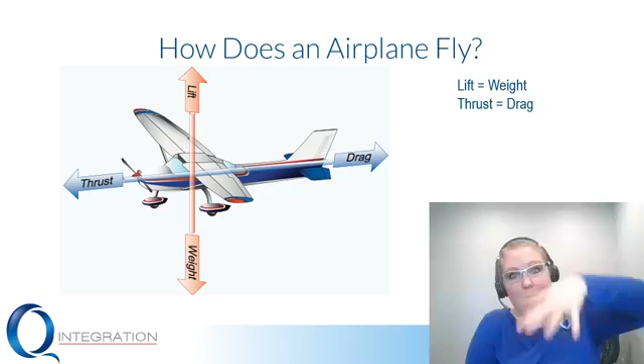So when you're driving down the road and you see one of those cars that has a big thing that sticks up on top of their trunk, it kind of looks like a wing. People call it a spoiler. That's the exact opposite of a wing, or it is a wing, but it's flipped upside down. The whole purpose of that is we want to create force to push it towards the ground so it'll hug the road tighter. Airplanes are the exact opposite. We want it to go up, not down, so we want the lift to be pushing up. We want to get off the ground, lift off the ground. So how do we do that?

Well, I'm going to introduce you to Daniel Bernoulli. Daniel Bernoulli is this guy back in, I believe, the 1700s, came from a super smart family, really smart family. He wrote a book, which a lot of smart people do. He has proven what's called the Venturi effect, and we're going to talk about that here in a second. But the Bernoulli principle is the basics of how anything generates lift.

And all it boils down to is having pressure on something. I want more pressure on the bottom of the wing than I do the top of the wing. If I have pressure, meaning I'm pushing up on it, it's going to be lifted up.

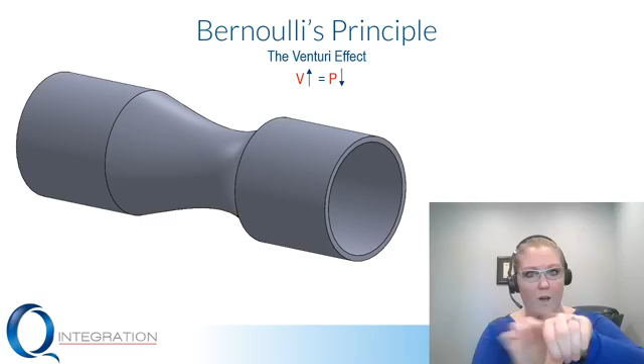Specifically, he talks about the Venturi effect, which I just mentioned a second ago. What is the Venturi effect? Well, picture a section of garden hose, some small section of garden hose. Now you put your hand around the middle of that section and you squeeze just a little bit, not so much that you shut off all of the flow in there. So we've got water going through here, just as you can see in our picture. This is our garden hose. Now we've squeezed the center here, but there's still water flowing from here to here. What happens to the water inside where it's being squeezed? Well, let's look at that.

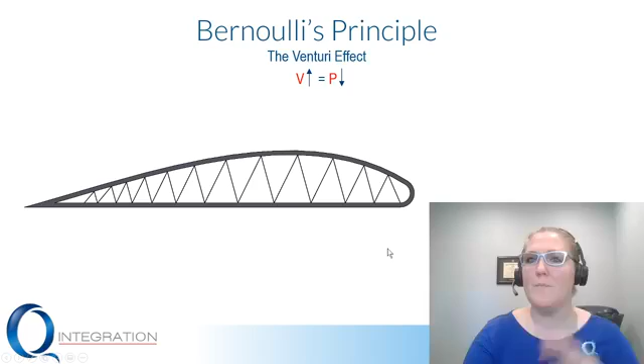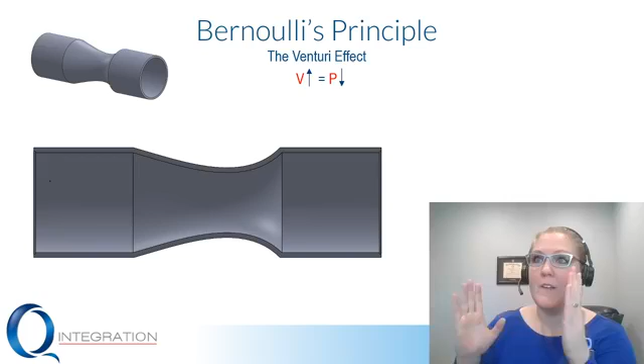I'll show you here in just a second. We've done a section view, and I've shown you an internal cross section of this Venturi tube, which is like I said, the piece of hose squeezed in the center. So what's happening when we put water from here to here?

Well, the Venturi effect basically boils down to: as velocity increases, our pressure decreases. Let me talk about that a little bit more. The wing would sit underneath here, so that's where your cross section is.

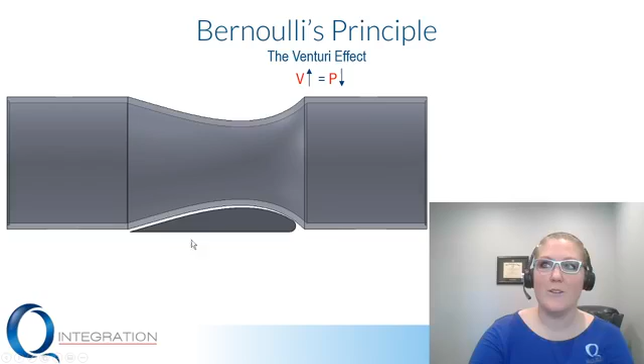We've got a ton of wind coming toward us, hitting the leading edge of this wing, trailing over the top of it and underneath it, and getting deflected off the back end. So notice how much more distance the air particles have to travel due to the fact that the top of this is curved, versus just having a straight path getting straight from here to here.

How do they do that? In order for these guys who have to travel way further to meet with these guys who don't have to travel very far at all — just a straight line, path of least resistance, which is a lot faster typically — these guys have to run a lot faster. So they're going faster than the guys down here, and the faster the velocity of the particles on top, the less pressure they're going to have.

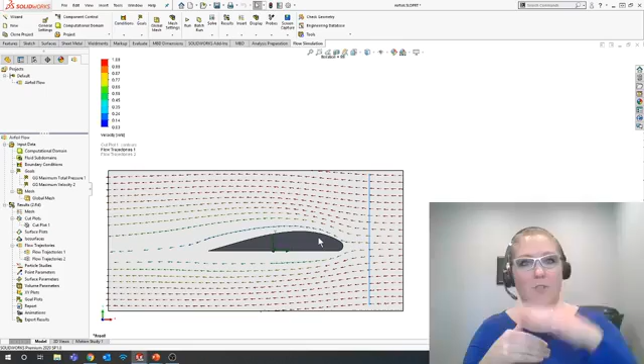Newton's third law of motion states that for every action there's an equal and opposite reaction. If I push on a table, or pick up this mouse, there's an opposite reaction — some sort of reaction force. If you push something down a hill, it's going to fall down the hill, opposite of the push.

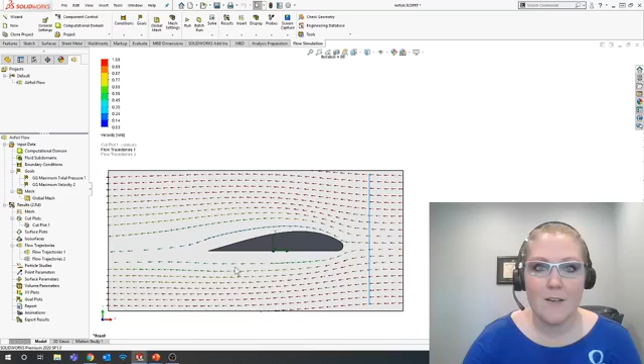So essentially, because there's high velocity up here, there's low pressure on the top. Again, an equal and opposite reaction has to happen. Where does that opposite reaction happen? Underneath the wing down here — so there's a high pressure pocket down there, creating lift underneath it.

So let's bring us back here — actually, let me show you real quick. If I turn this trajectory back on, this is done with a flow simulation in SolidWorks. If you look up here, this is our key showing the different velocities we have and what's going fastest, so on and so forth.

You can tell by color that these are going a little bit slower than these guys up here. There's all kinds of different result plots in FlowSim to show this, but this is a cool one — you can see the trajectory of the particle movements.

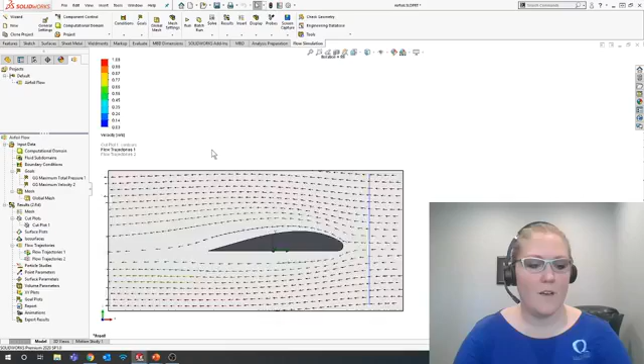So the last thing I'll touch on is: if you have a bunch of your friends walking through, let's say this is now a tunnel or a hallway that you're walking through. So let's say you and 10 of your buddies are walking through here, and all of a sudden the hallway gets really narrow, but you all want to end up out here at the same time.

The idea isn't that me and 10 of my buddies are just going to squeeze really tight together and then walk through. No, we're going to single file out and walk as quick as we can through so we can all get there on the other side. That's the exact same thing.

And that's proving Bernoulli's principle of the Venturi effect: as velocity increases, our pressure decreases, meaning there's less of us smashed together. So moving faster, less pressure, meaning we have low pressure on top, higher pressure on the bottom, creating lift, which makes an airplane fly. It's as simple as that. It's actually not near as complex as we make it, but for some reason it was hard for me to understand at first, until I realized I just got to single out into a single file line through the skinny part of the tunnel.